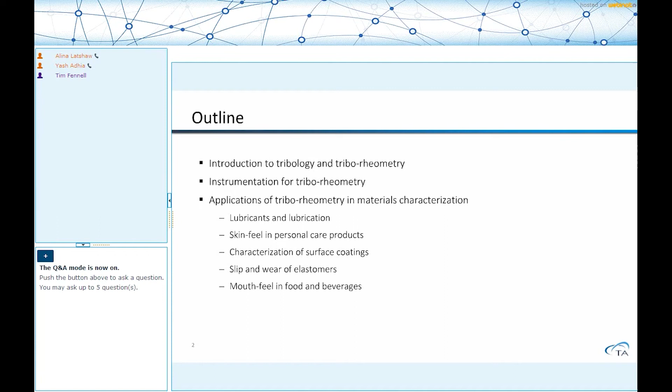First, tribology - if you look at the etymology of this word, it is derived from two Greek prefixes: tribos, meaning to rub, and ology, as we all know, is the study of. So literally translated, it means the study of rubbing, or the study of things that rub against each other. More colloquially, we know this as friction.

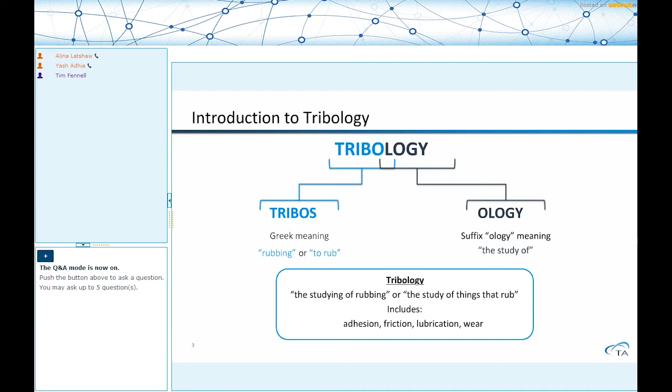So anytime we're talking about friction, there are multiple questions we ask: what happens at the end of that interaction or during that interaction? Do they adhere well, or do they generate a lot of heat? Does it cause wear and tear? These are the kind of questions that tribology tries to answer.

When we look at this in more detail, there's friction everywhere around us - from the soles of our shoes to the internal combustion engine, to baby oil, to coatings that we apply. I never really realized that whenever I touch these materials, there's a sense of perception I've developed - if I were blindfolded and touched certain products, I'd be more adept. Each one of us could probably guess what general category it forms.

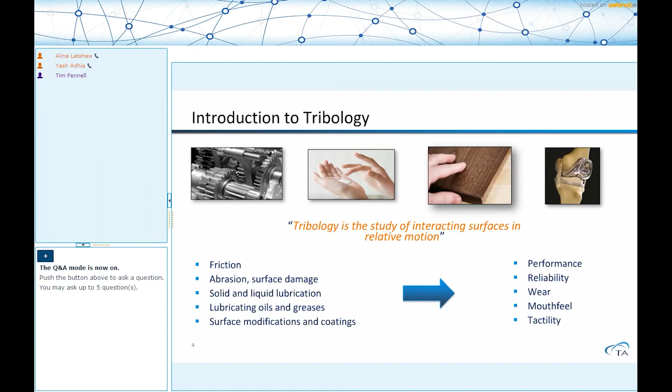This perception has become a very big industry driver to develop new products, and we're always talking about performance or reliability. If you're looking at an osteoarthritic fluid substitute, it has to perform the same kind of function that synovial fluids typically perform if it's going into the body. So there's this functionality element to it as well, which tribology tries to quantify.

Traditionally, if we take a trip down memory lane to high school, we have two bodies, one moving relative to the other - either both are moving, or in a simpler scenario, one is stationary and the other is moving. Whichever direction the moving body travels - in this case the top block - the friction force acts in the opposite direction. There's also a normal force acting perpendicular; the ratio of shear stress to normal stress is what is termed the coefficient of friction.

Now, friction force itself is easy to understand - it's definitely acting to impede the motion, and in some cases it also acts to assist the motion of the material. If we didn't have friction, we wouldn't be able to walk - everybody would be moonwalking all over the place.

So the loads interact with each other. If you have a small load force, what we're showing is that between the two mating surfaces, wherever the lubricant is present or not present, you have these surface roughnesses. Material that appears perfectly smooth to the human eye will have some roughness in it, and these roughnesses can be represented in terms of peaks and valleys, or what we term asperities. As you press down on the material, this plays a very important role in calculation of the coefficient of friction.

As a function of the sliding speed, this curve is called the Stribeck curve. We're going to explain some of the features in this curve in more detail as we go along the presentation. As you can understand from here, the coefficient of friction is not a constant value. It is heavily dependent, amongst other things, on the sliding speed. So whether the objects are moving slowly versus if they're moving fast against one another will have a big impact on the measured coefficient of friction.

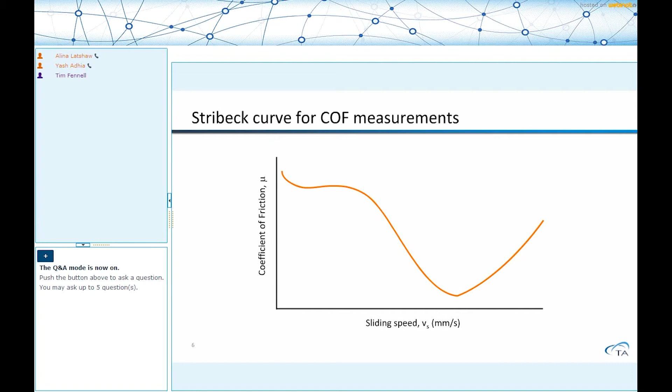Tribology and making those measurements using a rheometer. We're going to perform the same kind of friction measurements that we discussed up until now using the rheometer as an analytical tool.

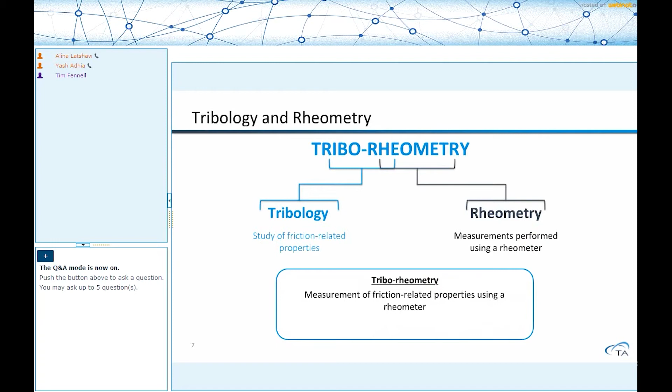One thing we can all appreciate, especially with a lot of the materials that we work with today, is that they can broadly be classified either as simple flow or having an intricate set of characteristics in terms of flow. A rheometer is a very powerful tool in making those measurements and trying to get a complete picture of how the material will flow when it is subjected to a deformation. For example, peanut oil versus cocoa butter will have completely different sets of flow properties. We'll have more examples showing how these flow properties differ at different shear rates during application.

We also use the rheometer for more powerful measurements to get information right at the molecular level, and what we typically measure is called viscoelasticity. I won't go into a whole lot of detail right now about viscoelasticity as a general concept, but we can appreciate that depending on whether you're working with something like mineral oil, skin cream, PDMS, or hydrogel, the rheometer is powerful and in fact the only tool that can make these measurements.

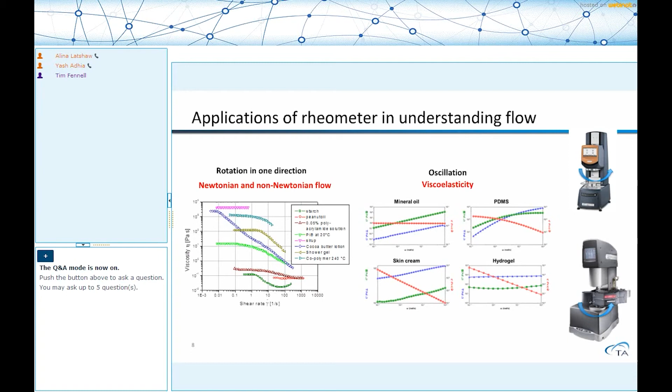So why do we use this rheometer to make friction measurements? First of all, because of the nature of the measurements we talked about in the previous slides, in general a rheometer is very sensitive to low forces. So if you're trying to measure what the frictional properties are at low forces, or what we call torque, the rheometer is very well adept to make those measurements.

While it can perform measurements along the shear direction, it can also make measurements in the normal direction, and it can at the same time control the amount of force you're applying in the normal direction. So you can press the materials by different extents and make these changes in very small amounts, much more adeptly than any other instrument out there.

At the same time, because of rotational velocity, you can control a wide range of sliding speeds, and essentially get a significant chunk of that Stribeck curve using a rheometer, though not necessarily the entire curve every time. The other benefit, of course, is that a rheometer will provide excellent temperature control because it is a mechanical and flow measurement instrument.

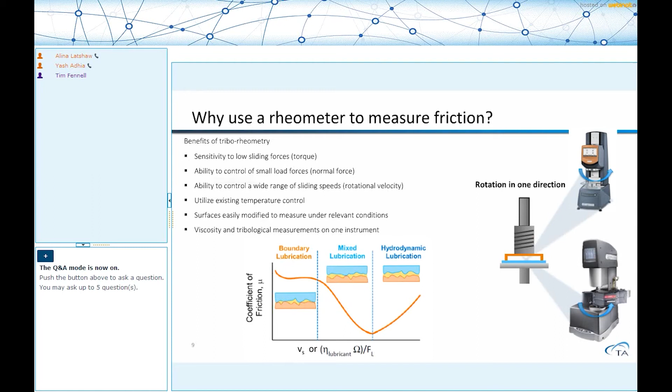Conceptually, if you look at the traditional diagram for how coefficient of friction is measured, except it's in a circular or rotational frame of reference. In this example, I've exaggerated the gap, but if you look closely, these surfaces are essentially in contact. One surface is fixed, the other is rotating. You are making measurements or controlling the angular velocity, the torque, and the angular displacement, which is related to the angular velocity, which is how it's controlled. You basically get a function of the torque, indicated by the letter M. The normal stress is also measured directly using the instrument, and that is a function of the normal force generated during these measurements, or the normal force you as a user have applied between the two surfaces in contact. So you get mu by taking the ratio of the two, and the sliding speed you are using.

So by making these measurements, we can perform measurements of all three parameters, what I like to call the trifecta of tribological measurements, if we don't count temperature into it. Temperature, of course, forms that fourth quadrant.

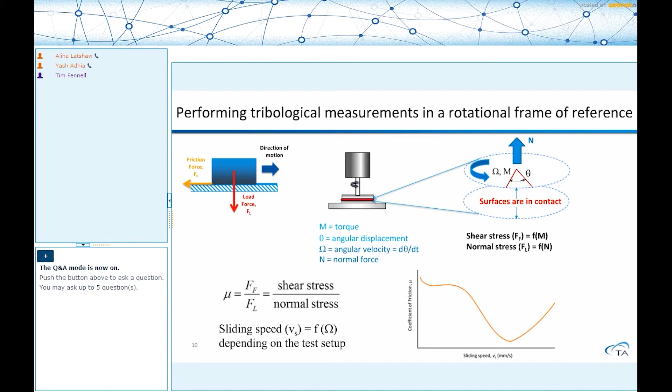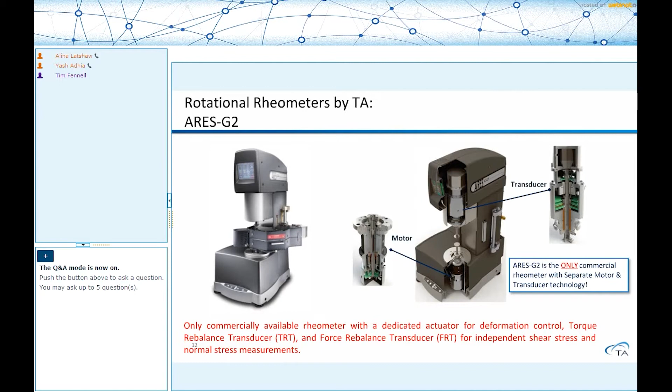Another professional instrument, the ARES G2, is the only rheometer out there today where the motor, which applies the deformation, and the transducer, which measures the forces and torques generated from that deformation, are separated. This is the only design out there, and it is unparalleled in terms of its performance or in terms of making certain sets of measurements.

Why do I say that? Especially, above all, it has the torque rebalance transducer. When you look at the word rebalance transducer, essentially what it means is that this transducer is not moving when it's making the measurement. We are going to do everything possible to maintain it in a null position. So whatever amount of torque I have to put in, in a conceptual manner of speaking, to maintain this null position is equal to the torque generated when the material is deformed, across a wide range.

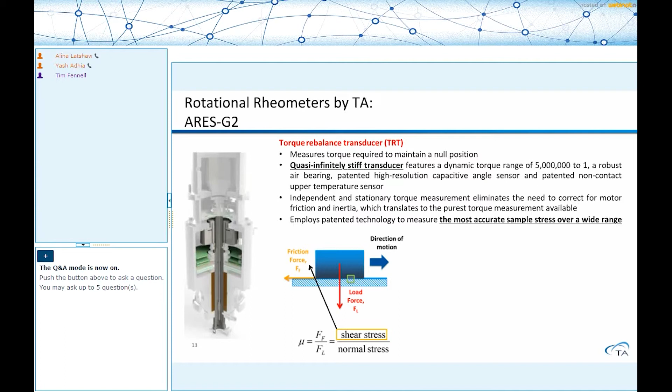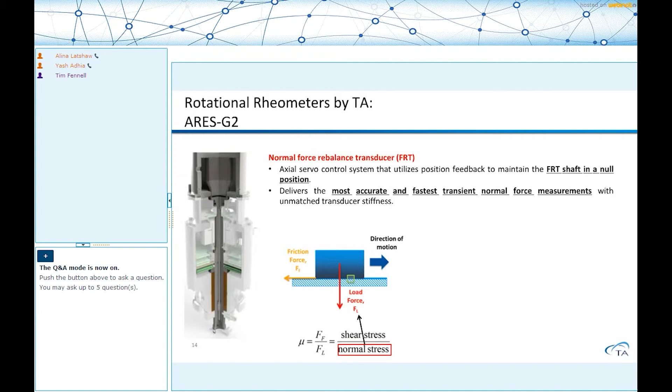Because these are making measurements of stresses generated in the shear direction, you are very well adept to make shear stress measurements. At the same time, in that transducer, there's a different transducer that independently makes normal stress measurements. The concept is the same: it is preventing the torque generated, and by the same token, when you push down on the material, that's how it measures the normal force. The benefit of this whole technology is it's accurate, sensitive, and extremely rapid in its response. So even the smallest changes in normal force, you can detect very easily.

The motor, which is the bottom part of this instrument, is completely decoupled from the top part. It's a brushless DC motor, which again is a unique technology. It has very high stiffness, is extremely concentric, and has an optical encoder built into it as part of this entire setup. All of these features allow you to control the sliding speed, or the angular velocity, in a very controlled fashion, from extremely slow to extremely fast, as a function of the sliding speed.

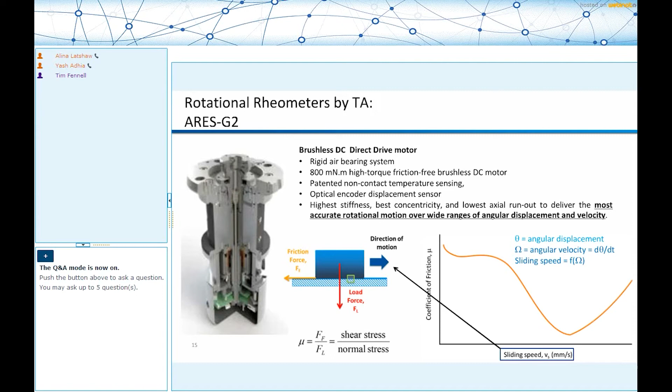Now, the environmental systems it offers are the forced convection oven and the Peltier system. Both of these are available on the rheometer, and the Tribo-Rheometry accessory is compatible with both of these environmental systems. It depends on what temperature ranges you're looking to perform the measurements at.

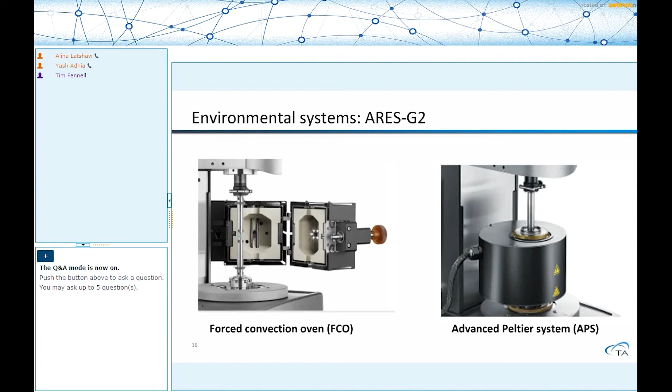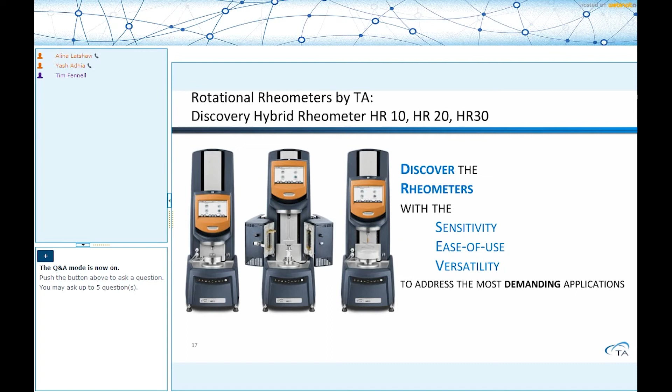When you look at why this is possible, one of the first things that stands out is that this is not your conventional rheometer with a traditional air bearing. It actually has a magnetic thrust bearing, which means the amount of air surrounding the bearings has been reduced by about 70%. That allows you to make shear stress measurements for tribological purposes at the very low end of the shear stresses.

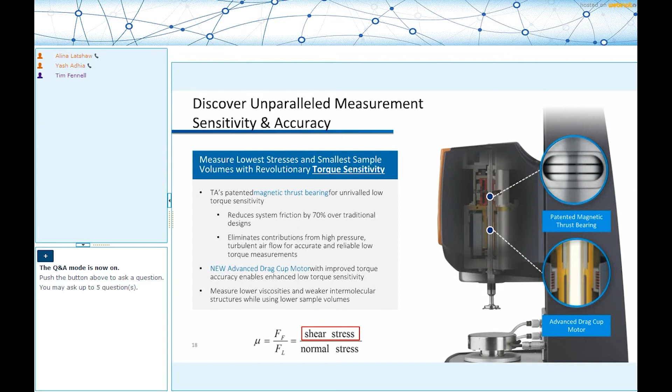At the same time, the overall construction of this entire rheometer is very rigid, and this is important because you want your measuring system to be stiffer than the sample. You don't want your measuring system moving around when your torque generated can get pretty high. So you definitely want something that is stiff, and the construction of this rheometer allows you to make these measurements.

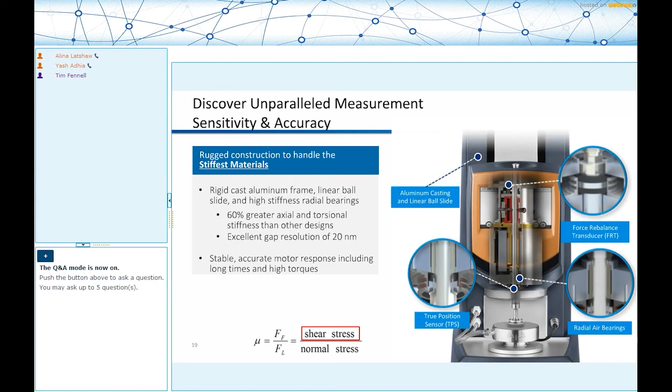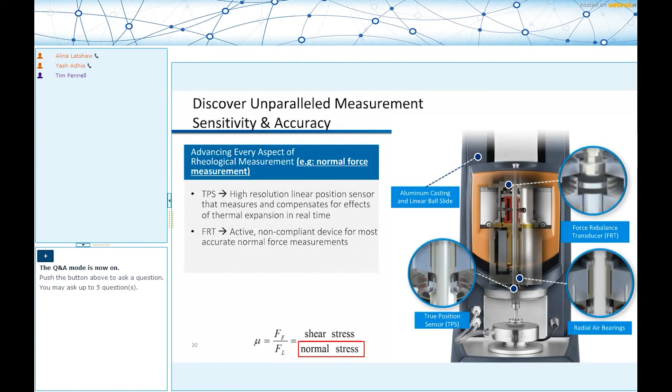So now we've covered the low shear stress regime and the high shear stress regime with the same instrument. And of course, it has the force rebalance transducer, which makes normal force measurements, and that allows you to make normal stress measurements very rapidly and facilely.

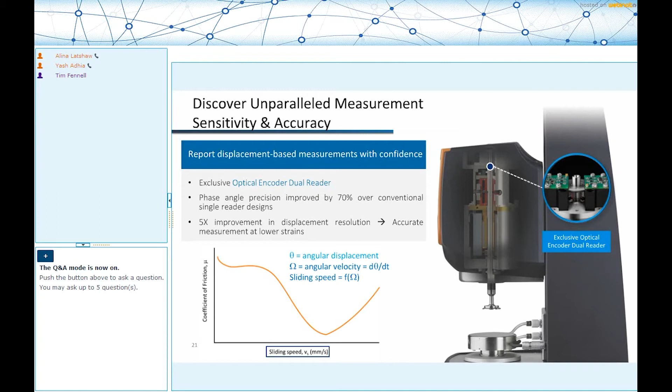The Discovery series can be used with the Tribo-Rheometry accessories. The other modular option that the Discovery series offers, and is unique in this case, is that it can control the relative humidity and temperature simultaneously, which is very useful because a lot of the materials we develop in the lab, when they eventually go out in the field, are not experiencing the same air-conditioned, controlled humidity environment that we subjected them to in the lab. It will allow you to perform tribological measurements under these extreme conditions. This is something very powerful in the Discovery series of rheometers.

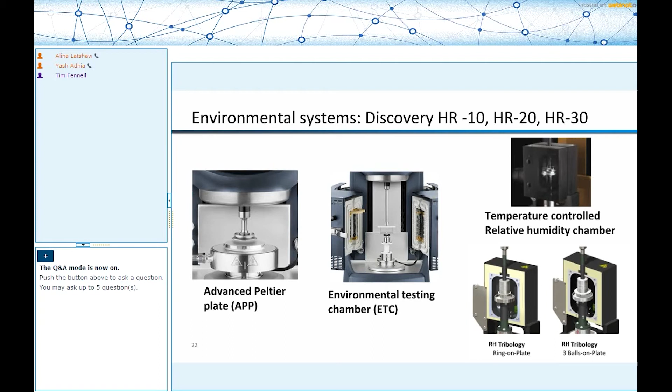So to summarize again, both these rheometers are extremely excellent in terms of making these measurements, both from the fundamental rheological measurement standpoint as well as the tribo-rheometric standpoint.

We offer the same temperature and sliding speed calculations, so we don't expect the user to go in and calculate them. You're welcome to, but we'll do a lot of this work for you. So we'll give you the sliding speed, the load force, the friction force, the coefficient of friction, the stresses if we can calculate them in a setup, and we'll also give you other dimensionless quantities that are typically used in these measurements.

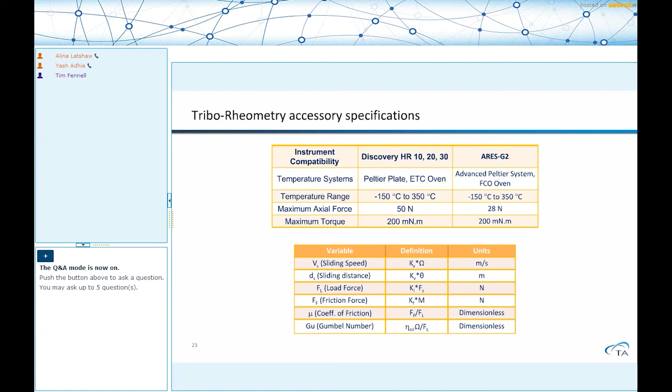A traditional rheological geometry that you might have seen, at least the ones we offer from TA, will always have a beam coupling. This beam coupling is there by design, because when you're pushing down on the material, you want some sort of compliance, but without compromising any of the overall stiffness of the material. It allows you to push down on the material with much greater control.

And remember that the coupling, even when you introduce compliance into the system, is still making those measurements very adeptly. If you had compliance in the normal force measuring system, you'd have a problem where the system itself is contributing to some of those measurements. We don't want that; we want the measurements strictly from the material. At the same time, because this beam coupling is at the top, when you push down on a material, the whole system transmits off the shaft and through the FRT, and that's where the measurement is made.

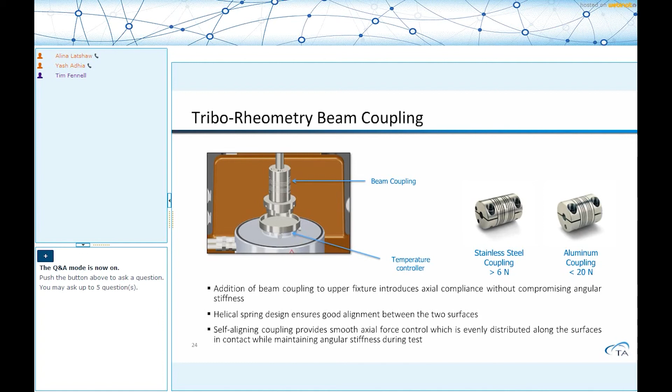We have four different setups that we offer. One is called ring on plate, so you have a plate at the bottom and a ring at the top. These names are very self-explanatory. Ball on three plates: you have a ball at the top and three plates arranged at an angle at the bottom. Ball on three balls: you have the ball on top and three balls at the bottom. Each of these geometries can be swapped out very easily.

There's a very good webinar on our website where we introduce Tribo-Rheometry, which is kind of a prelude to what we are going to talk about today. It goes into a lot of detail into the hardware and also presents some very interesting applications apart from the ones that we are discussing today.

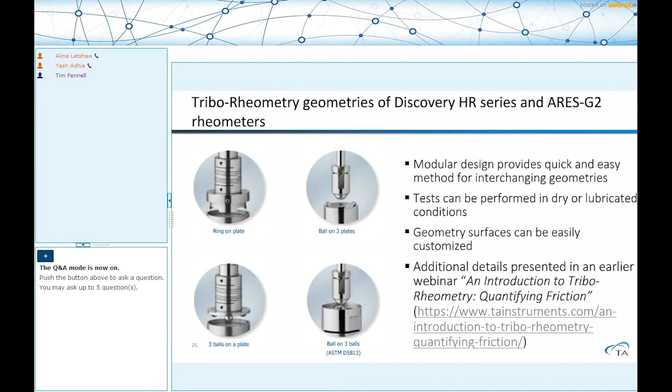That brings us to the end of the first part. One thing I will emphasize before we move to the next part is that when you're making friction measurements, there are three key criteria you need to be aware of. First is the surface itself - what is the nature of the surfaces coming in contact with each other? Is it skin on skin, skin substitutes? All of those variables will start affecting the measurement.

Remember, the friction of a material is not an intrinsic material property like viscosity or modulus. It is heavily dependent on the system and how you're making the measurement, and you can translate it onto the field as well. It is heavily dependent on how the material will interact with the moving surface. It would have very good properties in an internal combustion engine, but if you were to use it as a lubricant for ice skating, it won't work. Just the nature of the surfaces is completely different.

The roughness of the surfaces is one of the key criteria that governs this entire process. The second key criteria is the test parameter itself - the sliding speed, as seen on the Stribeck curve, starts affecting the coefficient of friction.

Temperature, with any mechanical measurement, is a very important criteria. Load force - we talked about how they will start influencing the way asperities interact with each other. One good way to select an appropriate load force is to think about the load forces the material will experience during the application. For example, mouthfeel is typically 1 to 3 newtons. The third criteria is the geometry.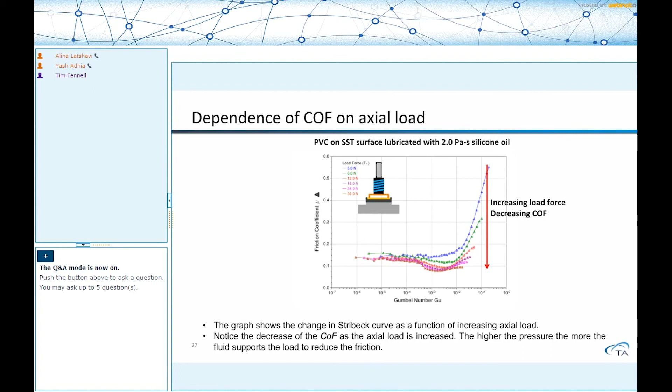In any lubricated system, the Stribeck curve can be split into 3 different parts. One where the coefficient of friction starts decreasing and remains flat, at slow speeds - this area is called boundary lubrication. With increasing sliding speed, that's the mixed lubrication regime. And the third regime, where the coefficient of friction starts to increase again, is the hydrodynamic lubrication regime.

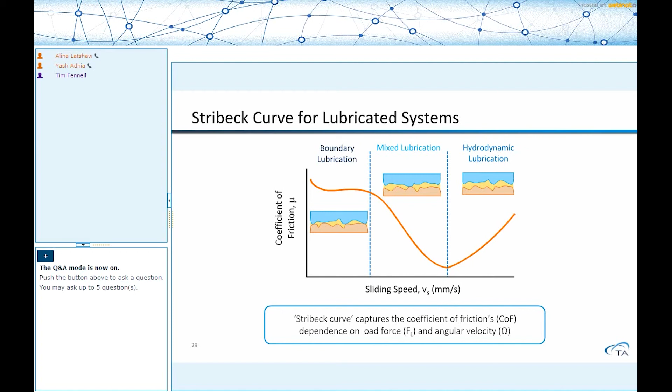So what do these individual regimes mean? In boundary lubrication, your asperities are basically in contact with each other. The lubricant is there, but because the relative motion between the materials is very low or very little, the resistance to the force is because of the asperities interlocking with each other. And so the system can move at slow speeds.

One thing I would like to highlight as we go through these different regimes is quite often in literature you will come across this term called the lambda ratio. The lambda ratio is the thickness of the fluid film between the two surfaces compared to the overall roughness of the surface - valley height. If it is 1 micrometer, in a typical boundary lubrication system, the overall fluid film thickness is less than 1.2 micrometers. I'm giving you a conceptual number just to understand how the lambda ratio starts playing a role in lubrication.

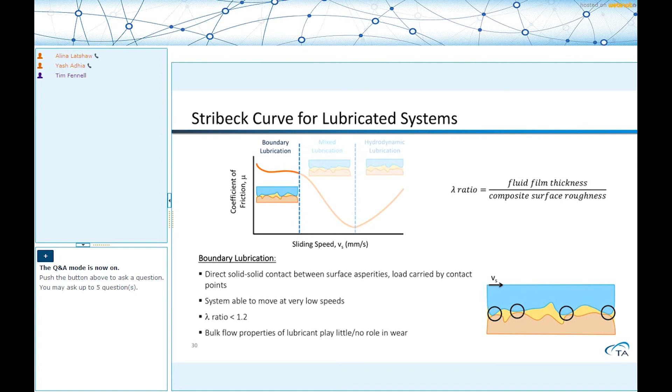Now, as the relative speed increases, the fluid starts moving between the asperities and slide over one another, which is what the lubricant was designed to do. You can appreciate that because now the lubricant is getting more and more into this interface, the fluid film thickness starts increasing. The surface roughness for the most part remains the same, so your lambda ratio also starts increasing.

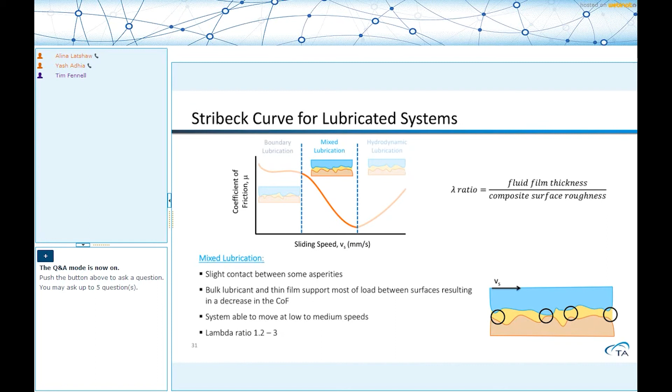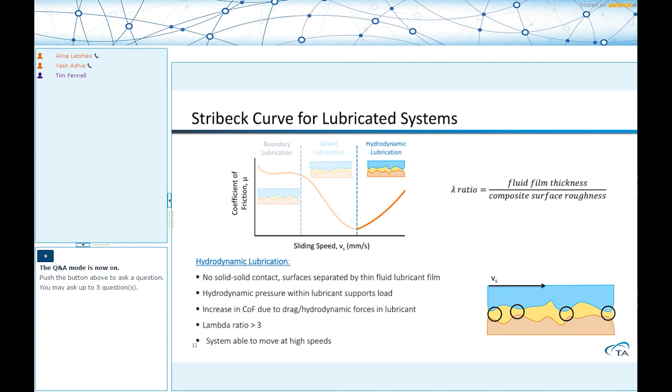And so lubrication and rheology, based on our last slide, I hope I've been able to convince you, they're interrelated. For example, if you look at an engine oil lubricant, and I keep revisiting this just because I'm a car aficionado myself, a good educational example, it requires a high enough viscosity.

While lubrication of engine oil is very important, and we need Stribeck curves and everything to understand why it's behaving the way it's behaving, a corresponding rheological measurement is worth a thousand words, I would say. So here, for example, we're showing some data where researchers took a base oil and added some additives that alter the flow properties of the material. The viscosity became higher, and while the base oil was Newtonian, the dispersion itself showed a slight amount of shear thinning.

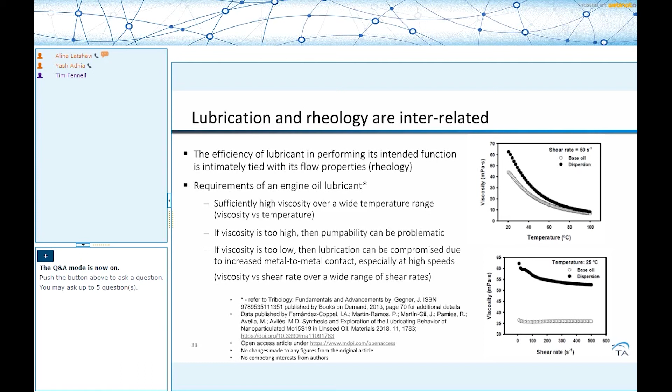And this could be desirable or undesirable, depending on the situation. But without knowing the flow properties, just looking at the lubrication properties won't give the complete picture. Vice versa, if you just look at the flow properties and don't look at the lubrication properties, that's also not right. This is an example taken from a previous webinar, where it's explained in a lot more detail.

Here we're just showing you how the coefficient of friction changes as a function of sliding speed. We're making this measurement at 180 degrees Celsius, so a very high temperature. You can identify the different regimes, but at a very high level, you can at least appreciate that lubricant B is the material of choice over here.

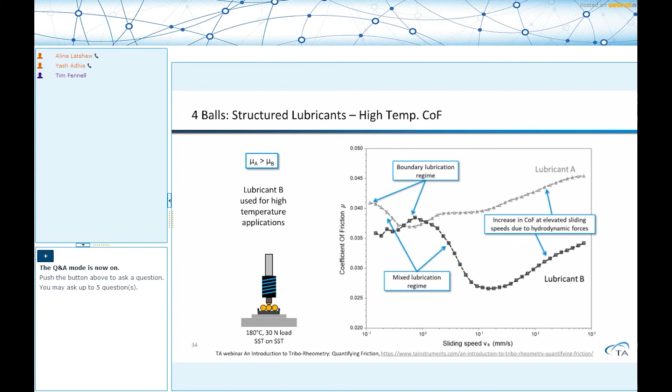Along the same token, what we'd mostly be talking about is dynamic friction, but there's an important concept in tribology, which is static coefficient of friction. For those familiar with rheology, this is akin to yield stress, which means the two surfaces are at rest, and you're applying a force and they're not moving because the frictional force is resisting it. So the response, or the coefficient of friction that you measure under these conditions, is called the static coefficient of friction.

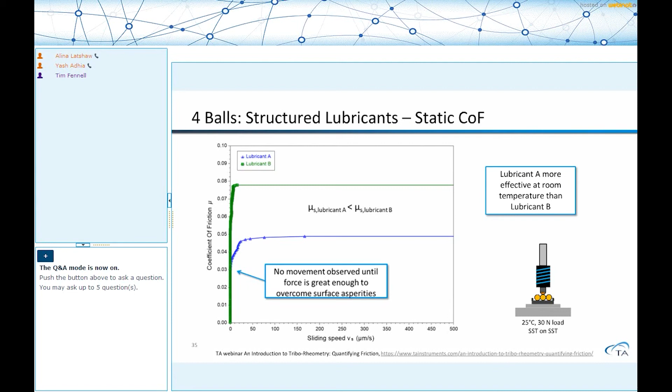And again, here you can see initially at low sliding, when the sliding speeds are 0, you're just increasing the torque acting on the system. As the torque keeps on increasing, eventually the material starts moving, and that's when you see a big shift in the sliding speed.

This is where, when you look at warm mix asphalt technology, or hot mix technology, a big amount of effort is driven to improve the processability of asphalt while laying it down on the road, without having to heat it up too much. I won't go into the whole lot of details about the exact mechanism - the paper I've cited here is a very good reference that goes into the details at the molecular level. What I do want to show is that friction plays a lot more important role than one would envision in understanding why warm mix asphalts behave the way they do.

And how you can use these measurements to understand the overall mixed lubrication regime as it starts increasing.

So at 100 degrees Celsius, at 20,000 micrometers per second, the friction starts increasing. But at 120 degrees Celsius, the friction is more or less constant, it's decreasing, but it doesn't start increasing until orders of magnitude ahead.

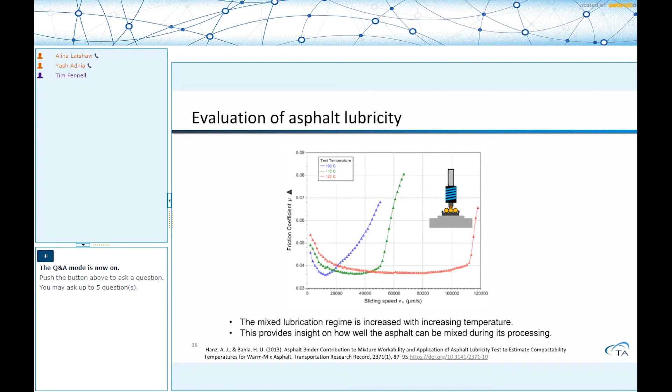And so this gives you a very nice idea about how the different additives that are added in this particular asphalt mixture to improve its processability is hyperbranched polymers.

With a background in macromolecular science, I always get very intrigued by different molecular architectures. So while a conventional polymer can be thought of as a linear chain that is entangled with each other, the hyperbranched polymer or a dendrimer has a circular structure, and that offers a whole lot of different benefits. For example, you can go to higher molecular weights and still maintain a lower size, which in turn translates to lower viscosity, hydration properties, right?

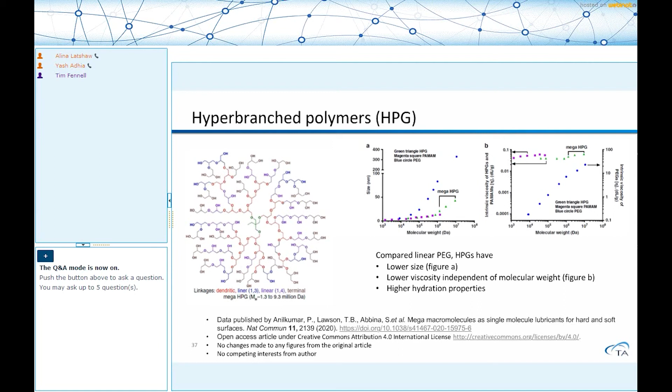And so when you look at the flow properties of these different materials, in this particular study, they were looking at comparing the lubrication behavior of different materials. So they took a bunch of commercially available lubricants, and they found that compared to the shear thinning behavior in the commercial lubricants, these materials more or less exhibit Newtonian behavior than the other. What I want to show is one is different than the other.

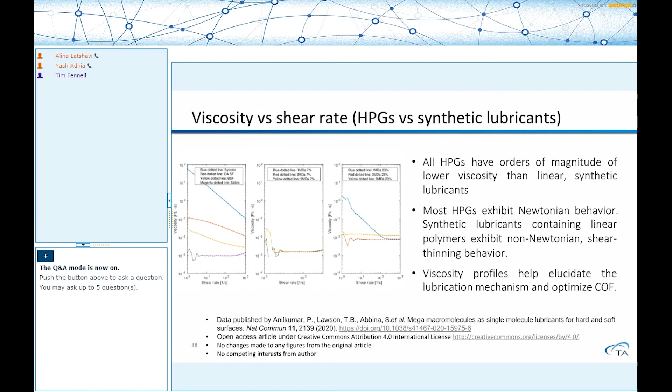And the interesting thing is when they started investigating the use of these materials in terms of its lubricity, they found that the hyperbranched polymers, represented in the blue circles and blue triangles, have very comparable coefficient of friction and tribological properties, compared to the conventional synthetic. These molecules have a globular structure. They act as tiny ball bearings between the two surfaces that allow it to offer the lubricity that you can see in the graph over here.

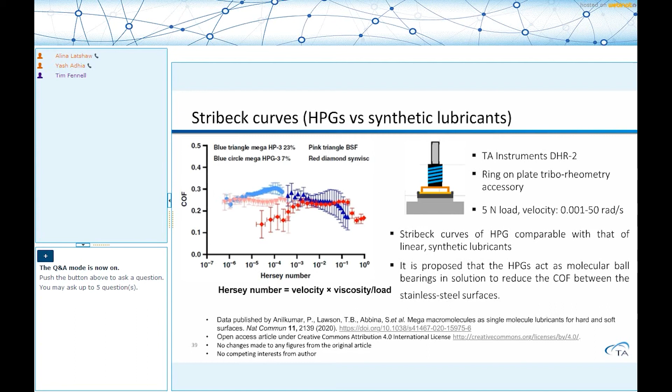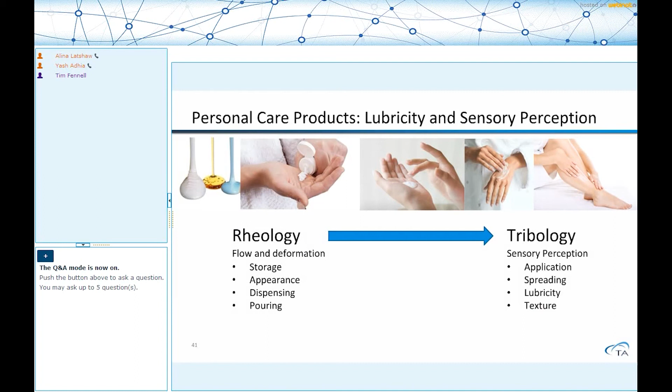So again, because your consumer is going to feel it with the hand, what we are going to do, in order to understand this, is use TransPore tape and also Vitro-Skin. Both of them are commonly used as skin substitutes. And we're going to test first baby oil, cold cream, and body lotion. All of them have different rheological profiles and different formulations altogether.

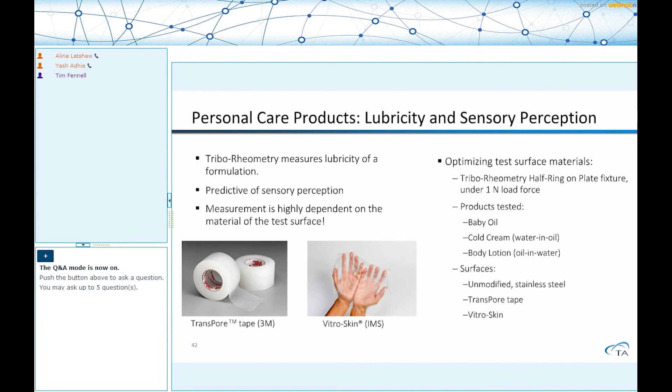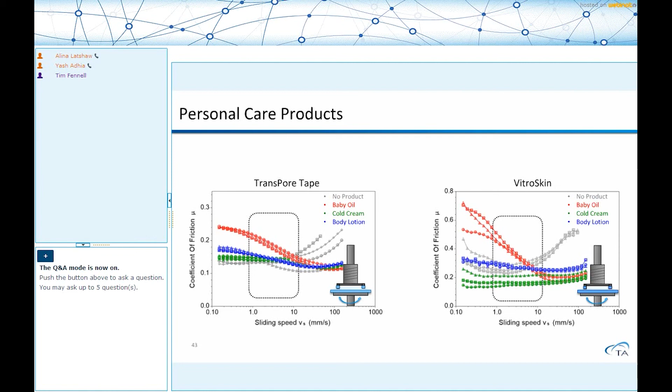So at first, it's not that it's going to replace any sensory panels, but at least when you're in the initial development stage, it allows you to understand how each material is going to behave, because this is the same kind of perception behavior that you will get from a sensory panel, which comprises of trained humans. And those are more expensive tests, so this allows you to do it more efficiently.

Another example is toothpaste. As we brush our teeth, of course, we don't like something that is extremely rubby, or we don't like something that's extremely fluid. So there's a balance that you have to strike over there.

And so you can see that when you look at a gel toothpaste versus a whitening toothpaste, at low speeds, they look similar, but at high speeds, the gel toothpaste flow properties differ. If you look at the viscosity of these two materials, at low speeds, they're more or less comparable, but as you go to higher speeds, the gel toothpaste doesn't shear thin as much. So it has a higher viscosity.

And again, when you go into the hydrodynamic drag side of things, a higher viscosity is going to impede the motion more.

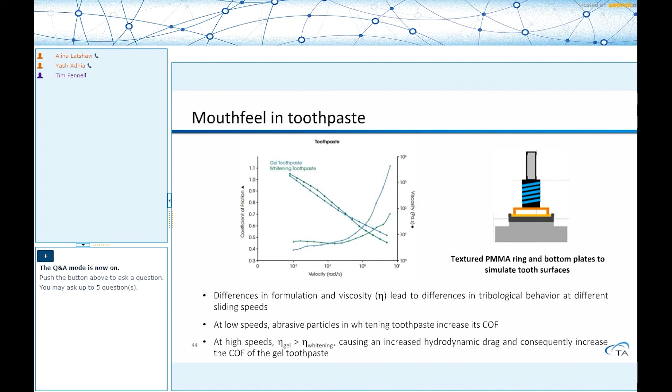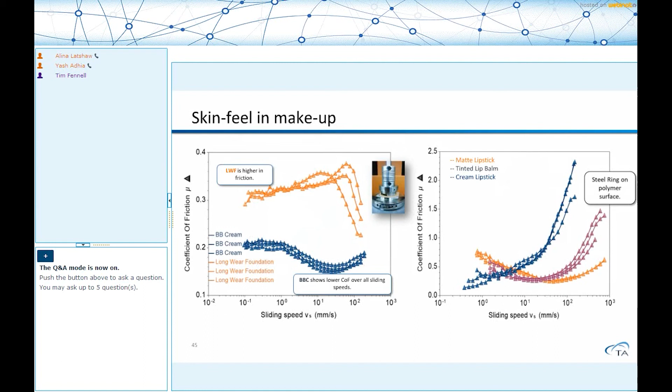It's data that has been collected and definitely very, very useful. Where you look at BB creams versus long wear foundations and makeup or lipstick, each of these materials has its own intended function, and you can see how the coefficient of friction of each of these materials is quite different compared to one another. What is also interesting to note is that within themselves, the overall repeatability of the data is excellent.

And that is where the power of the rheometer is, that when you're using a ring on plate kind of setup, you want to make sure that you trim the excess sample, because that excess sample can cause some extra drag and you don't want that affecting your measurements. This is very similar to the conventional rheological measurements as well. And again, we talk about this in the first part of the webinar, or the link below, where we presented on Tribo-Rheometry.

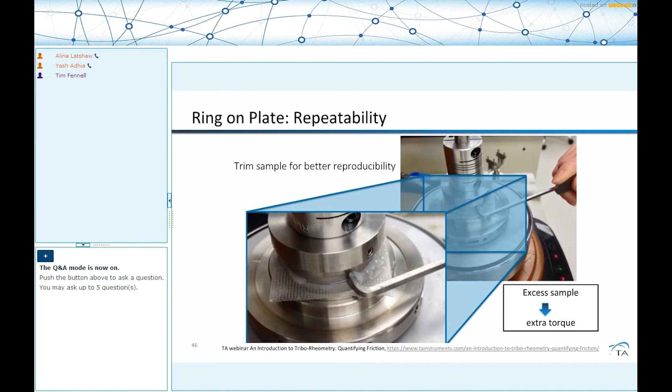The second application I want to talk about today is wondering where does surface coatings and friction come into picture. Think about every time you've felt the wall of your house when you were just standing against it, and you start realizing, like when you go to different houses and you place your hand or your body against the wall, you feel a slightly different perception. And this perception is important, because at the end of the day, if I am a consumer, I want a certain level of finish. One is, of course, the optical property - whether it's flat gloss or matte or satin or semi-gloss, so that's the amount of light.

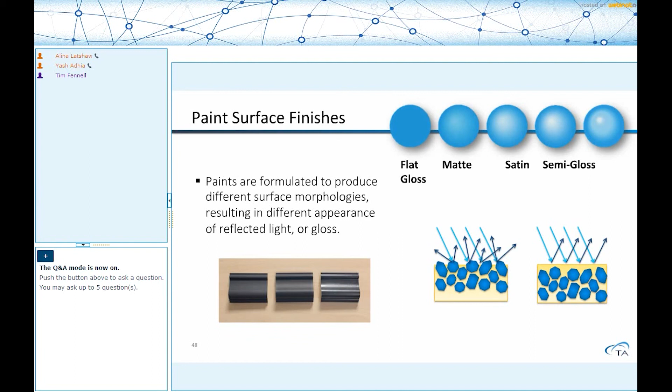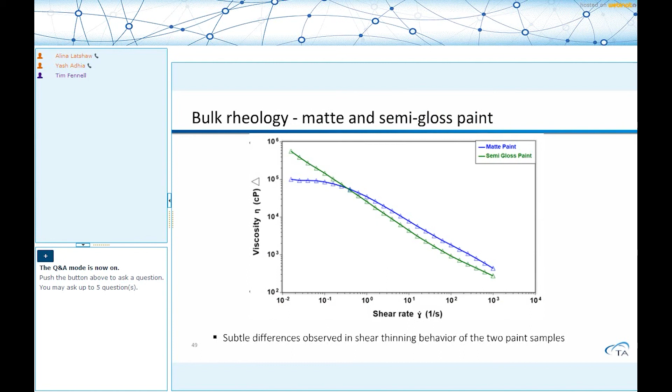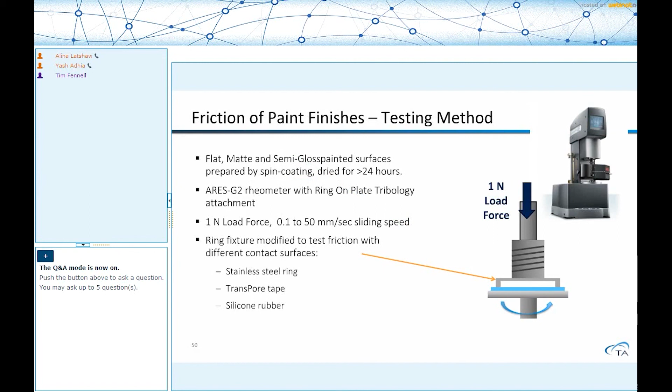And so the question, when you look at just the bulk flow properties, of course they'll be slightly different. For example, when we've taken two kinds of paints, one matte and one semi-gloss, you can clearly pick out the subtle differences between the shear thinning behavior. The matte paint, in fact, shows a much more pronounced zero shear viscosity. Add the second level of testing, if you may, and see if I can first of all get an additional data point of differentiation, and second of all, how can I use this information to understand the perception that a customer would have at the end of this whole process.

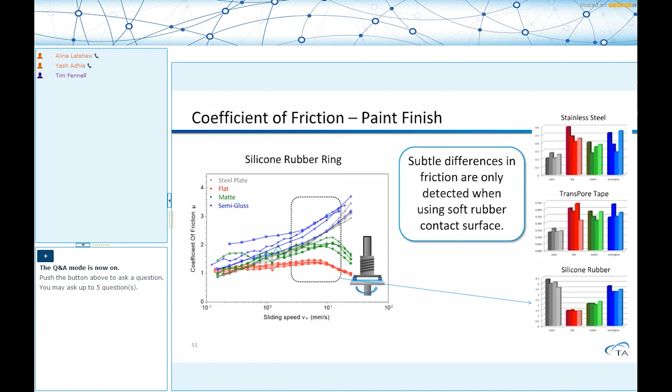Since we're talking about rubbers, let's move right into elastomers, where you can see what we have on top of that plate. And you can see the benefit of using this setup over the traditional ball on 3 plates, where you would have to cut out and put the elastomer on 3 different plates. This is much faster, and as I'll show you, it gives you a wider spectrum of tests and conditions that you can simulate.

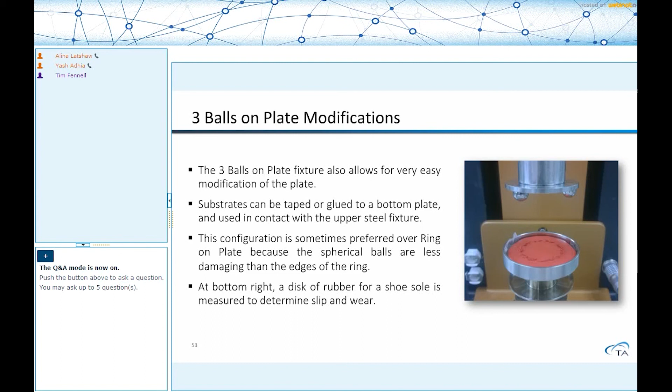Okay, so now if you just take dry surfaces, so you have steel balls on top, rubber at the bottom, at slower speeds the coefficient of friction is more or less comparable to B and C.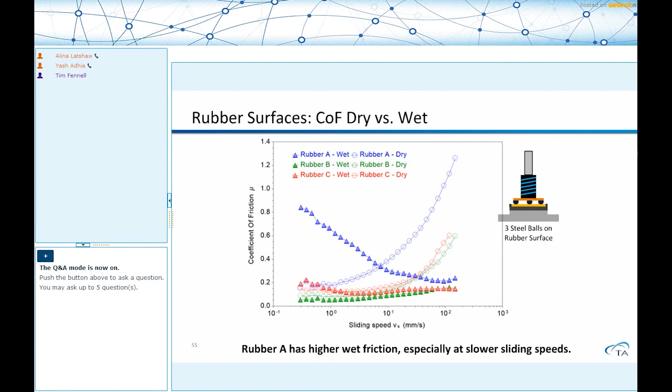The last set of applications I want to talk about is mouthfeel in food and beverages. When you look at how a material feels when you eat it, or as you are eating it, that perception is extremely important, more so than in any other field, in terms of consumer acceptability. I certainly will not put anything in my mouth otherwise. These are things that start making a big difference in the overall perception of the material.

The surface properties of the material, which are really the properties we measure at the micrometer to nanometer scale, are the ones that start affecting the overall mouthfeel, or the frictional properties that we're going to talk about.

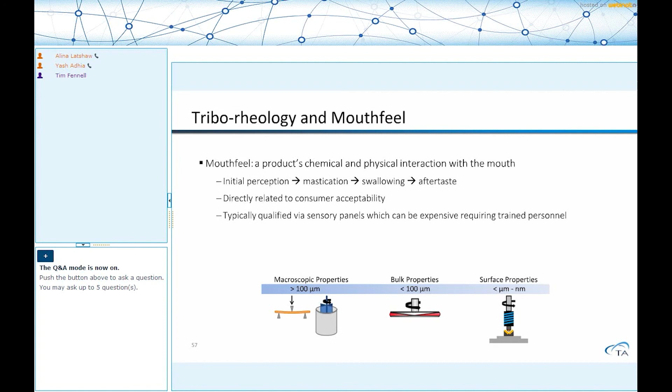These have a constant viscosity, but you can appreciate that if you try to spread honey on bread, it's going to be a much more daunting task compared to spreading mayonnaise on bread. So honey on bread versus mayonnaise on bread is the classical rheological paradigm we talk about. Because mayonnaise is shear thinning, as you apply more and more shear to it while spreading, it thins out and the viscosity reduces.

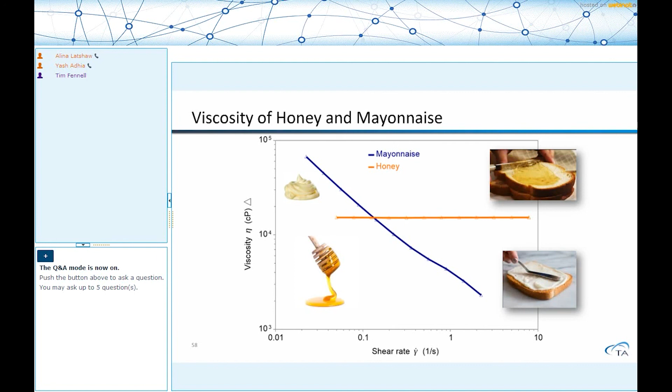So we are very well aware of this. The coefficient of friction is more or less comparable, but as you go to higher and higher sliding speeds, which is where the hydrodynamic regime starts setting in, you start seeing that honey gives the perception of a much higher coefficient of friction compared to something like mayonnaise or mustard.

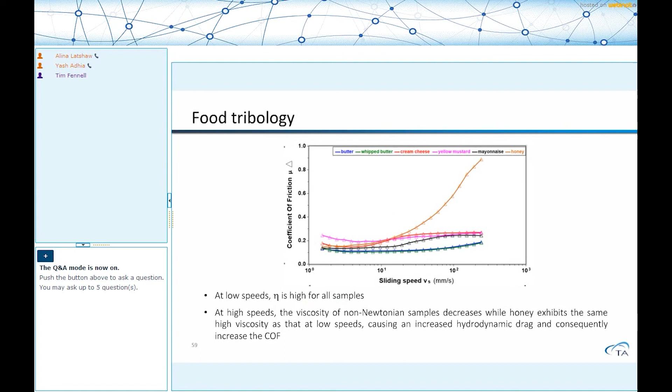All the other materials that are non-Newtonian have some structure to them. Honey is purely Newtonian, but more importantly, it is much more viscous. If you take honey out of the equation and just look at those five non-Newtonian fluids, they also exhibit quite significant differences in coefficient of friction. Those differences would be tied to their intimate structure, the amount of fat present, any additives, and subtle differences in the rheological profile.

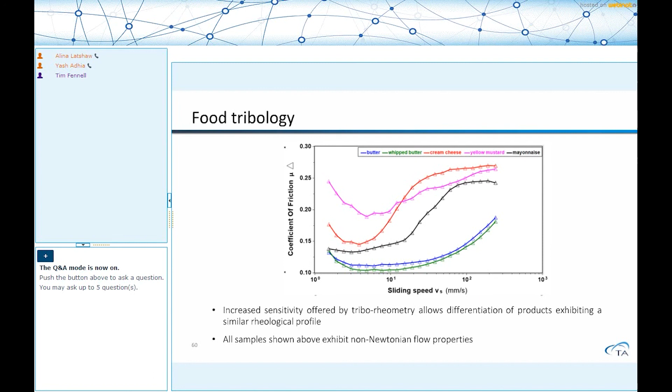So that topic alone could become a webinar in itself, since this technique picks up these differences very easily. We covered food tribology in a lot of detail in our first webinar, so by all means, one more motivation for you guys to check it out.

We talk about the mouthfeel of chocolate. And for people on the East Coast, this is getting close to lunchtime, so I hope I'm stoking up your hunger—that's why I kept food tribology as the last topic.

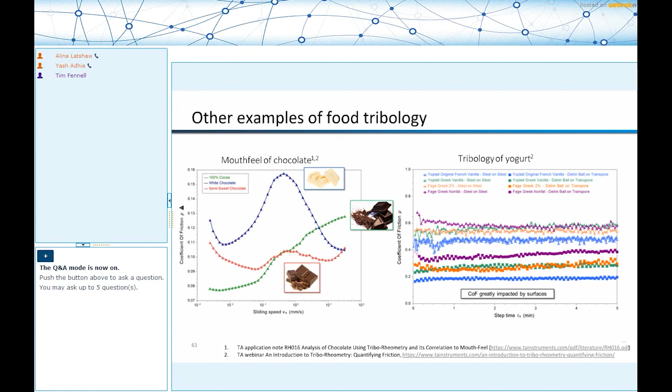And so chocolate and yogurt, of course—the data on chocolate has been published as an application note as well. In summary, with all these examples, I hope I've been able to show you that friction, of course, is a very important measurement, or tribology, but it is not an inherent material property.